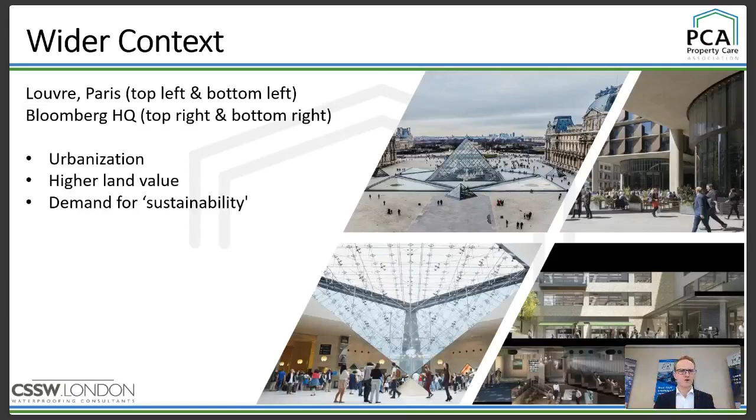What is a podium deck? Is it a plaza or a terrace or a balcony or a warm roof or a buried roof or a garden roof or a green roof or a blue roof or a tunnel or a bridge? It's got elements of sort of all of that.

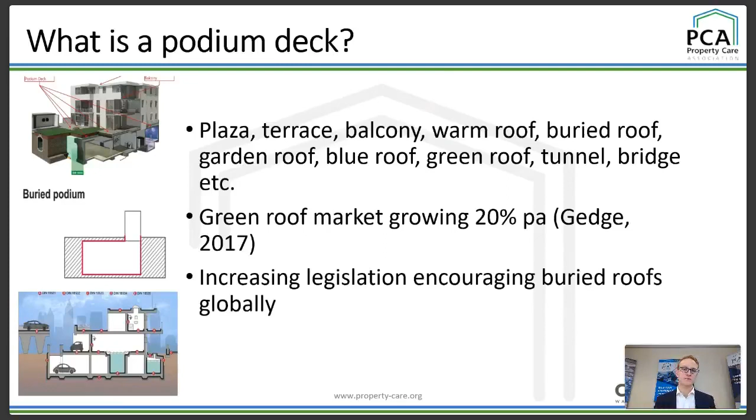Podium decks are very similar to green roofs, and that's a growing market in London. I think that market is growing about 20% per year. Globally, there's more legislation to put things on roofs. So France, for example, if you have a new commercial building, on that roof you have to provide either photovoltaics or green roofs. And that's not just France, you're also getting it in Canada. Certain cities have a lot of pressure to provide green roofs. So there's some wider context.

We were going to run this poll. Last week I was contacted by someone in another country, and he was saying he's involved. He's a structural engineer on a design team working for a pharmaceutical company, and they want to put 50 million pounds of equipment in a basement, and on top of that basement is a podium deck. And the structural engineer was saying to me, look, money's no object. What is the best possible waterproofing that we can do?

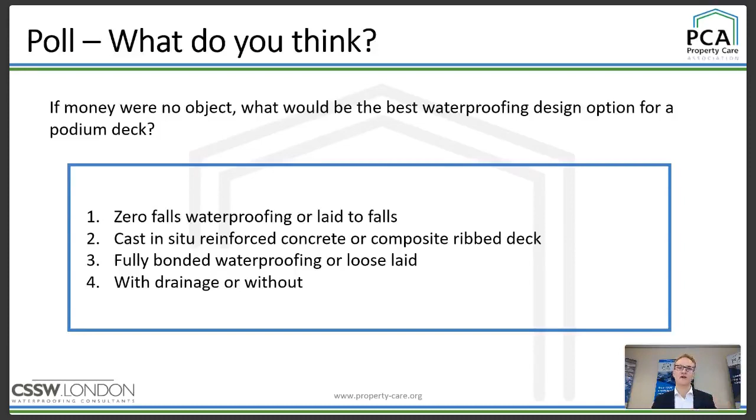So we were going to run this poll, but it doesn't work right now. But I was going to ask you, what do you think is better, zero falls or laid to falls? So that's a flat roof or a roof with a pitch to it. Do you think it's better to have cast in situ reinforced concrete, or is it better to have composite rib deck? Is it better to have fully bonded waterproofing or loose laid waterproofing? Is it better to have drainage or not have drainage? And these are some of the questions that are out there. We'll revisit some of the findings. When I did research, I asked those kind of questions, and I'll talk you through those findings in a moment.

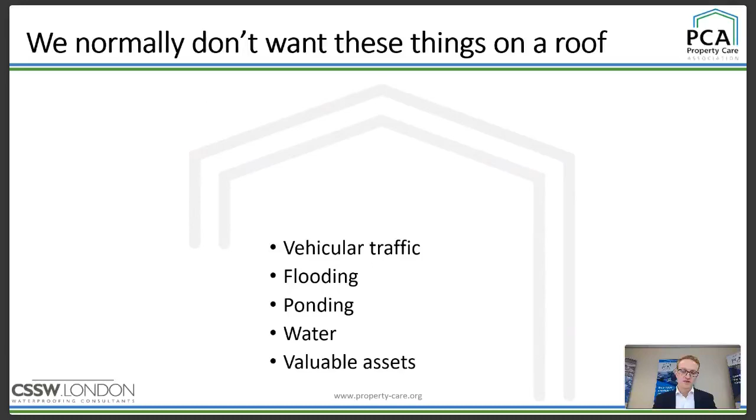There are some things that we don't want on a roof. And for many of those watching, the members of the PCA, they come from a building pathology background like I do. And I used to do a lot of residential surveys, and I'd look around houses. And if I was looking around a house, it was a pre-purchase survey, and I saw this on a flat roof, I would have a duty of care to say, well, there's a building defect. We don't like ponds on roofs.

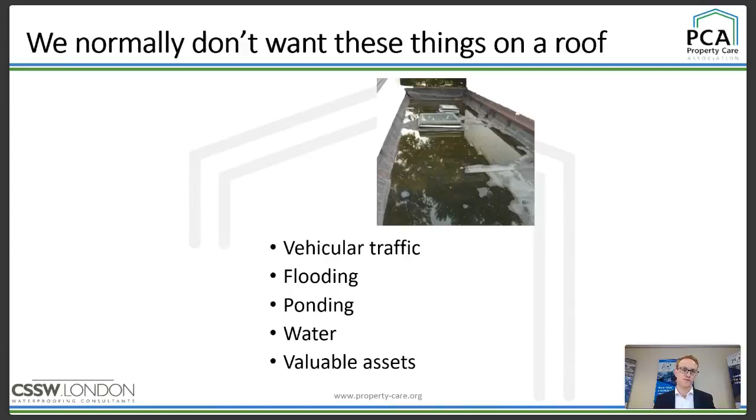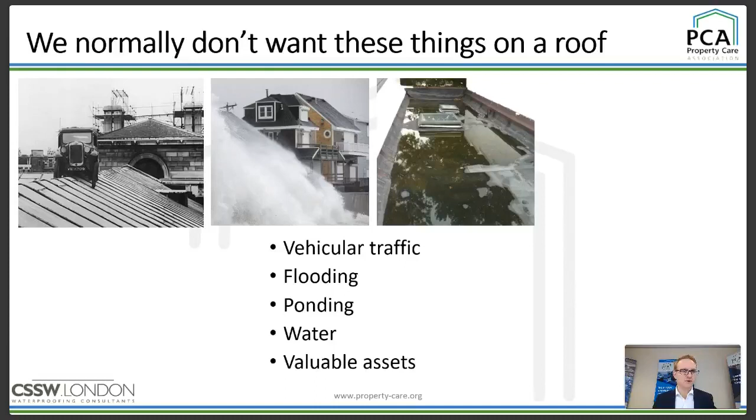That's not a good thing. We would hate to have waves on a roof. Roofs aren't designed to have waves on them. Flooding is not something that we normally think about with roofs. We don't often think about vehicular traffic on a roof. That's not something that we normally have to plan for. And we wouldn't expect to see something like a swimming pool or other very valuable assets on a roof.

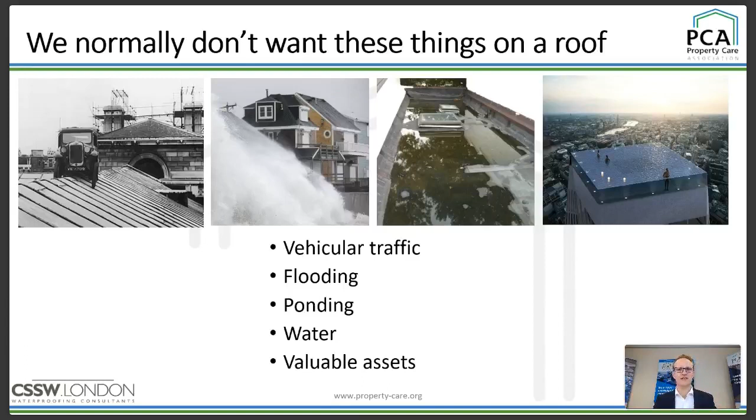And yet, somehow that gets through planning, and a developer requires it. And somehow, as a design team or as a specialist contractor or as even a supplier of products, you need to be able to come up with solutions for these issues. So we must design for them.

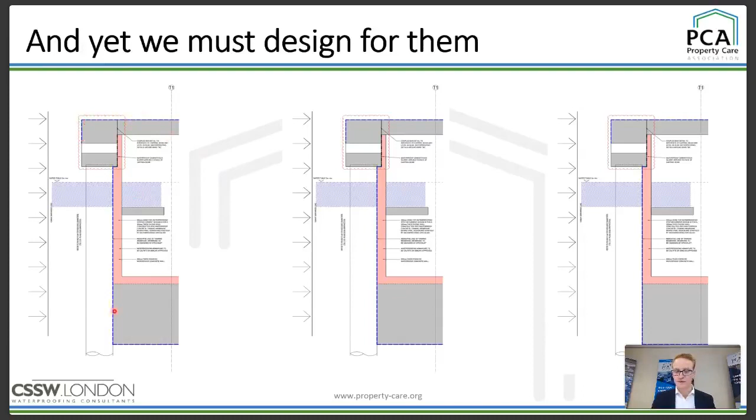This here is a section detailed through a basement in Manchester. And you can see this blue represents the water level, double-story basement, high water table. Blue is supposed to be watertight. Sorry, this pink here is supposed to be watertight concrete with a pre-applied waterproofing type A system down here. And over the top of there is a podium deck with some waterproofing of some description. Now in this circumstance, there was no way to convince the client and the other members of the design team that we had to have that podium deck to fall. So the reality is that podium deck will have ponding.

I'll put a picture of a fish there because you keep fish in a pond. We've also got to plan for, in this circumstance, traffic. So many podium decks have to be able to accommodate, for example, a fire engine. In an emergency, services need to get close to the building. That might be a podium deck. And in this circumstance, there's a 1 in 1,000 flood event comes to about 600 mil above your podium deck. And so we need to plan for flooding, which is different to most other building assets or other roof guidance.

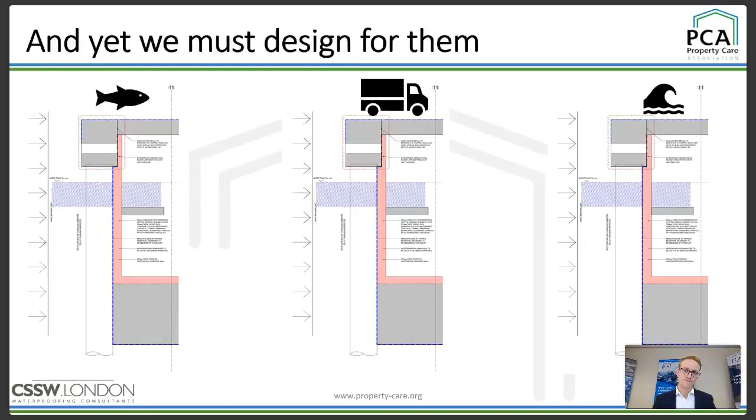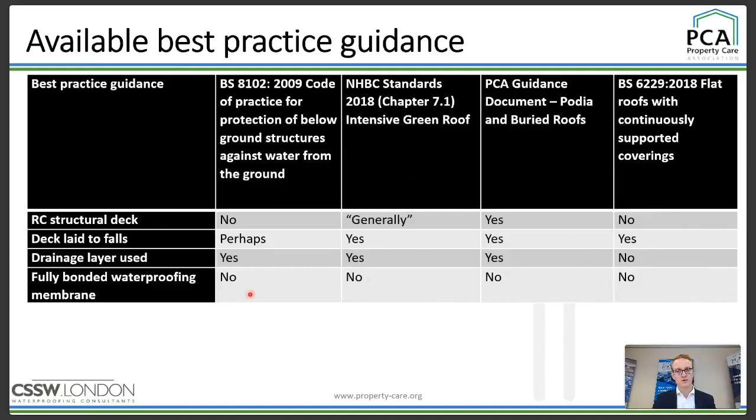NHBC chapter 7.1 sort of asks for a structural deck that's reinforced concrete. It does ask for falls, does ask for a drainage layer, makes no mention of fully bonded waterproofing. PCA guidance document, at the end of this presentation you'll be able to download a copy of that, and you'll share that somehow in a moment. And then BS 6229 2018 is a very fresh document, new, hot off the press, and that doesn't make much mention of reinforced concrete decks. Talks quite a lot about falls, and I'll cover that in a moment. Doesn't really talk about drainage, but none of these documents talks about a fully bonded waterproofing membrane, which is interesting, and I'll tell you why in a second.

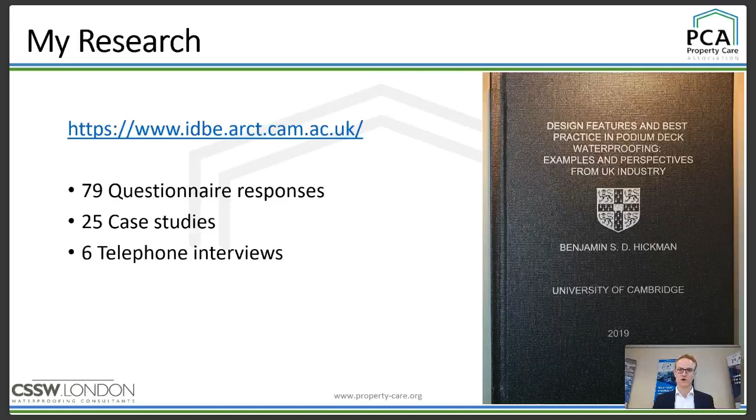I looked at 25 case studies of Podium decks that have gone wrong. And then I did telephone interviews with 6 people who were highly experienced, but had views that weren't what I would expect. So I'm just going to share some of the outcomes of that research in a moment.

I asked very similar questions to what I asked you earlier, which was - if money was no object, considering the best possible waterproofing - to what extent do you agree with the following statements? To what extent do you agree that reinforced concrete substrates are better than block and beam or ribbed deck? To what extent do you agree that falls are better than zero falls?

The options available to the respondents were: strongly agree, agree, neither agree nor disagree, disagree, or strongly disagree. That's called a Likert scale - you can give it to people as, to what extent do you agree with the following statements?

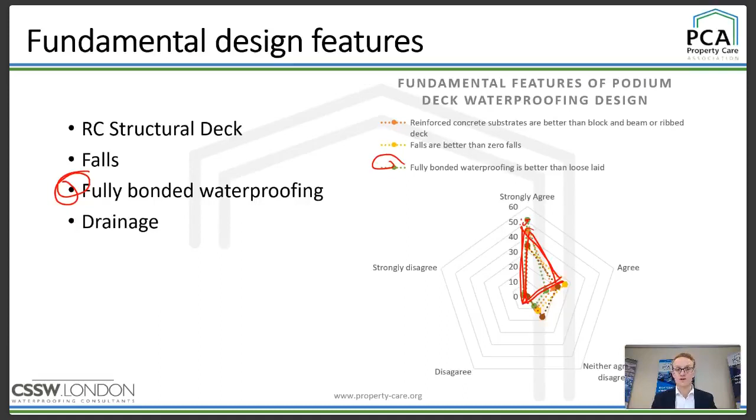Fully bonded waterproofing is - most people would very strongly agree that it's better than loose laid waterproofing. That's particularly interesting when you consider the table I shared earlier of best practice guidance, none of which says you should use fully bonded waterproofing on a Podium deck.

The reason we think fully bonded is better than loose laid is because if you have a loose laid waterproofing system, any defect allows water to track laterally across your substrate, and that makes it impossible to find the defect, which means you can't really repair it. Fully bonded systems would mean that hopefully, if you look up from a basement and see a damp patch, the defect in the waterproofing is directly above that damp patch.

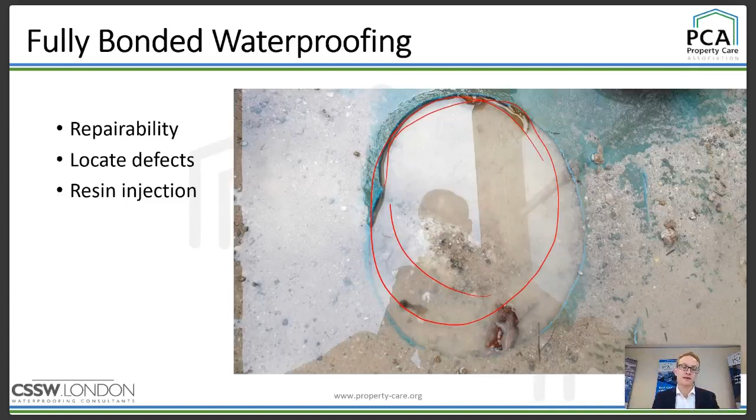So why is a reinforced concrete deck better? Well, primarily because it's dimensionally stable. With something like a precast concrete plank, there is a lot of movement, and that movement can cause a lot of shear forces on your waterproofing.

Reinforced concrete does mean you've got to deal with some crack bridging, so would any system. But you sometimes see block and beam, they move a lot. So if you have a block and beam substrate, it does flex, and that can cause issues.

Hollow core planks, again, they flex and they move against each other, which provides a very strong cutting force, really. So if you've got waterproofing across a precast concrete plank deck, and there's stuff above it and stuff below it, and one plank moves more than another, that's quite a strong cutting force, quite like scissors, really.

And rib decks, they're a bit of a nightmare, in my opinion, because your crinkly tin is actually waterproof a lot of the time. So it means you've got a waterproofing defect above your concrete deck that goes through your concrete and spreads across the crinkly tin, and it comes in who knows where. So again, it's impossible to find where the defects are.

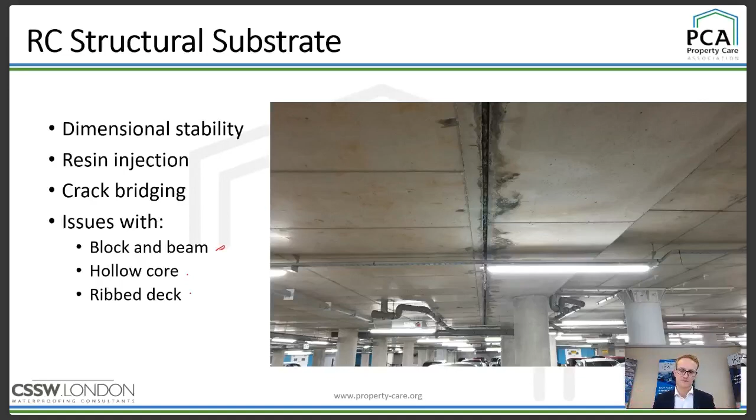The reservoir is the bigger one there, because if you have a small defect with a small amount of water, that small amount of water goes through and hopefully evaporates from the underside of the deck. But if you have a lot of water goes through a defect, that's a problem.

So you've got to make sure that you've got sufficient drainage. Importantly, those drainage outlets must be in the right place, and there must be the right number of them.

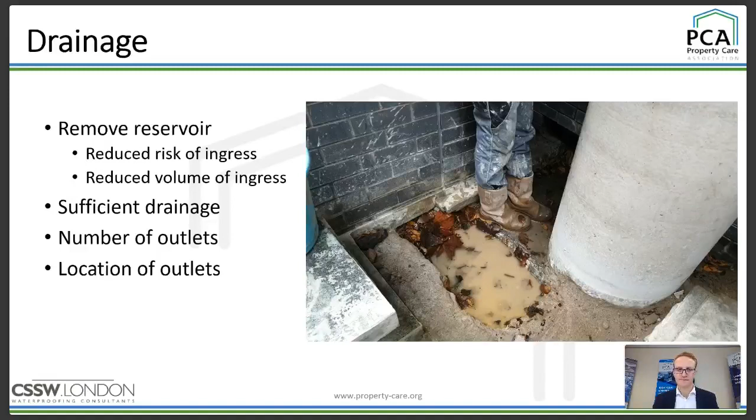Why? Because removing water off a roof reduces risk. It's very basic, very obvious. So what sort of gradient to falls would you get? Well, BS 6229 would say design a 1 in 40 fall so that you achieve a 1 in 80 fall.

I put here mention of zero falls. Now, zero falls is a bit of a funny thing. BS 6229 probably most clearly defines what zero falls is, and it's anything less than a 1 in 80 fall, but it cannot have any backfalls. And backfalls are basically the ponds. So zero falls is a very tricky one.

But I guess my own opinion is if you've got waterproofing to a roof type structure or a podium deck, having falls is really going to help remove water, and that's a good thing.

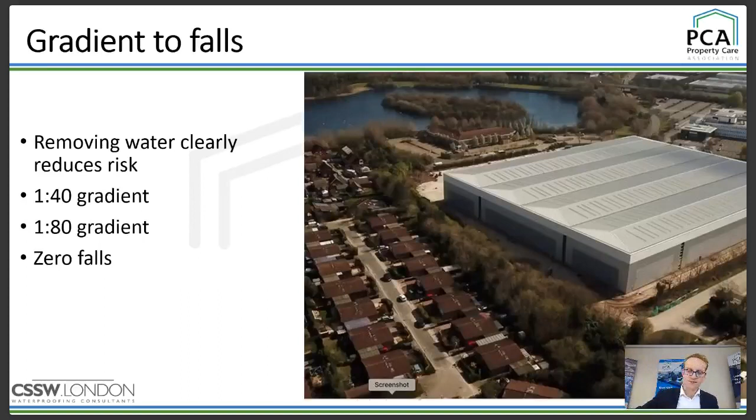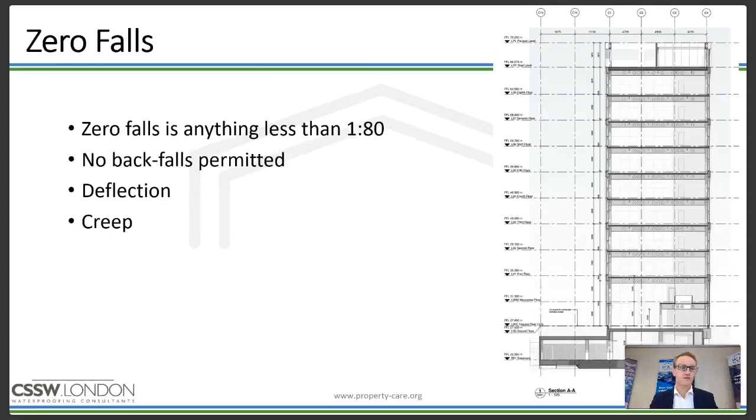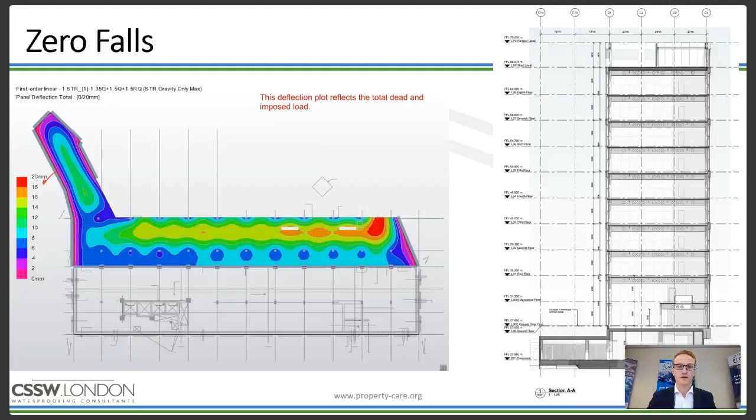Zero falls - many products will be accredited by BBA for zero falls situations. Unless you've actually designed in falls, you haven't got zero falls. And what you can do is put your outlets in your depressions, your points of deflection, and that in some ways does give you falls.

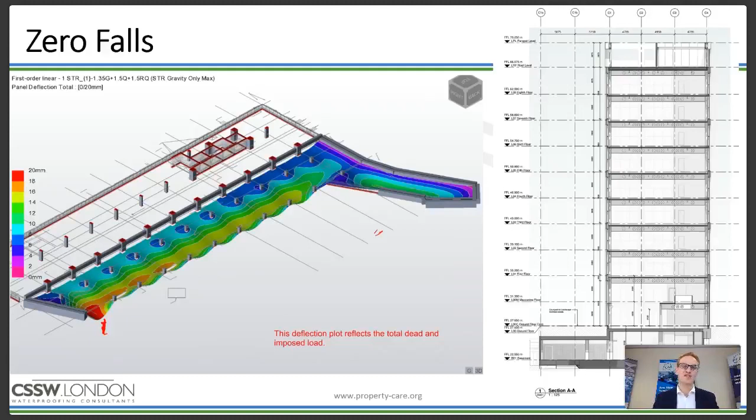So I'm now going to talk you through, I think it's 4 different possible podium deck build-ups, and just try and explain what are the benefits, what are the issues.

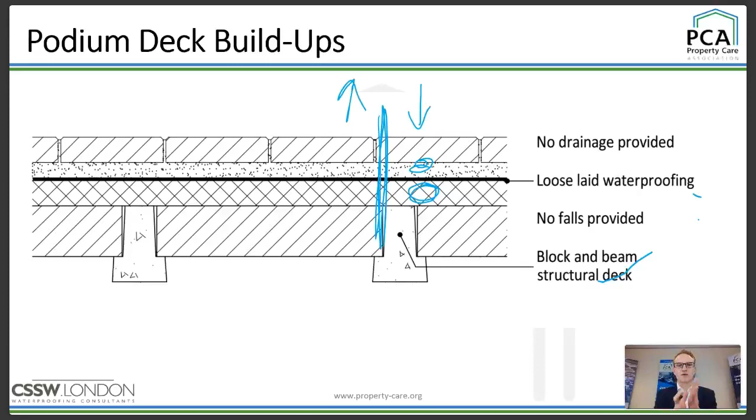Here's another build-up. You've got block and beam with loose laid waterproofing. Block and beam substrates are a bit of an issue because you get deflection, so you get movement often across there. You can see that this bedding mortar is sandwiching the waterproofing against this screed. If they move differentially, so if this bit goes down and this bit goes up, it's like scissors on the membrane, so it causes defects to the membrane.

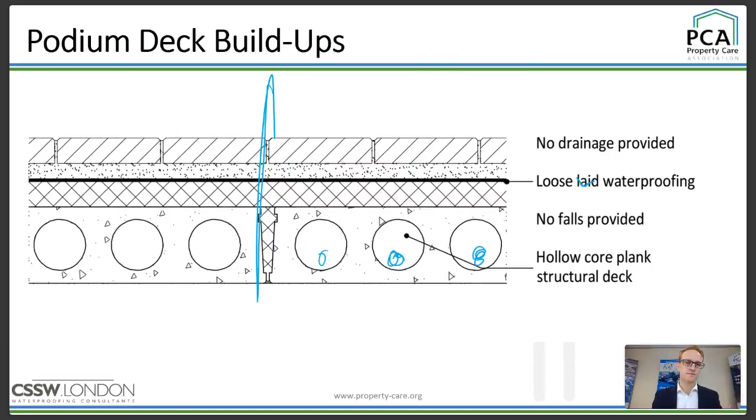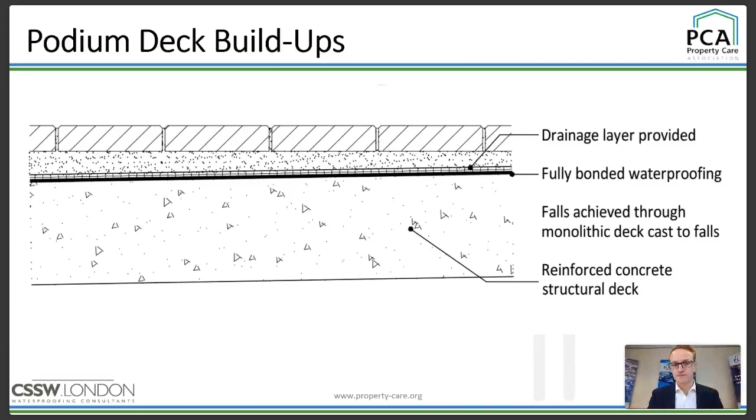So here's what I think is the best possible podium deck waterproofing build-up. You've got a reinforced concrete deck that is monolithic and it's laid to fall. Monolithic means there isn't 2 separate layers to it. There isn't a screed layer that's tapered into falls. The whole reinforced concrete deck is cast to falls. You've got fully bonded waterproofing and you've got a drainage layer, so water can run away. If there were a defect here, water you would think might come through somewhere there. So you can sort of trace where the defect is, and you can assume that you can do a localized repair.

So I'm now just going to run through, I think it's 8 different additional things. I've run through 4 things so far, which I think are the fundamental features of podium deck waterproofing. What is your substrate? What is your waterproofing? Is it fully bonded or loose laid? Have you got any drainage, and have you got falls? Those are fundamental features.

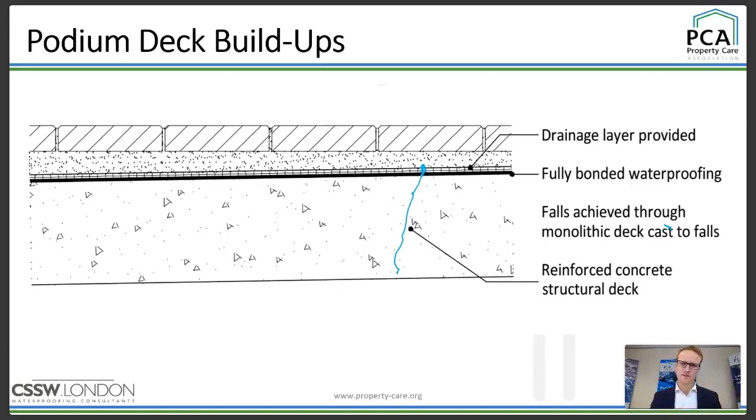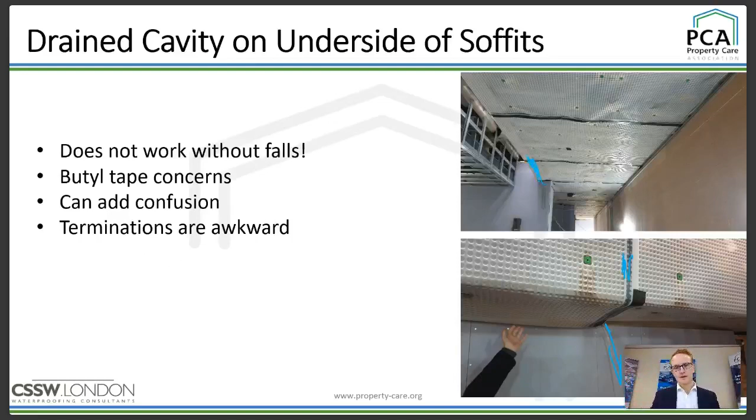Movement joints are a tricky one and common to podium decks. So I would say, if at all possible, remove them. And that means a lot of close discussion with the structural engineer.

For podium deck waterproofing, much like basement waterproofing, you want somebody involved early on in the design stage, who can liaise with the structural engineer and architect and influence the shape of the building. It's not just a case of detailing, whack on this product in this place - there's more to it than that. And something like a movement joint makes it quite obvious.

So avoid movement joints, and if you must have movement joints, try not to make them on a boundary line. That's just the natural inclination of developers in the developing process. The developer will say, here's the whole site, build a basement under all of it - tower 1, tower 2, tower 3. And they'll draw red lines saying, this is plot 1, plot 2, plot 3, and they might sell off plot 2.

If you have a movement joint on that red line, then you've got design team A and design team B, and neither is responsible for the movement joint - it's just a common point of ingress. It's a very weak point, because movement joints have to be flexible.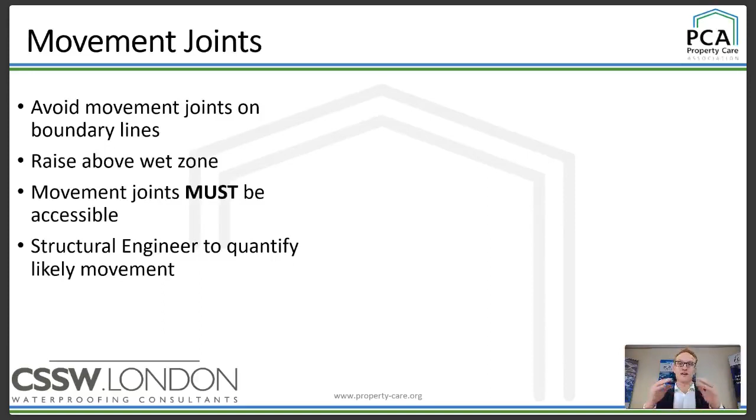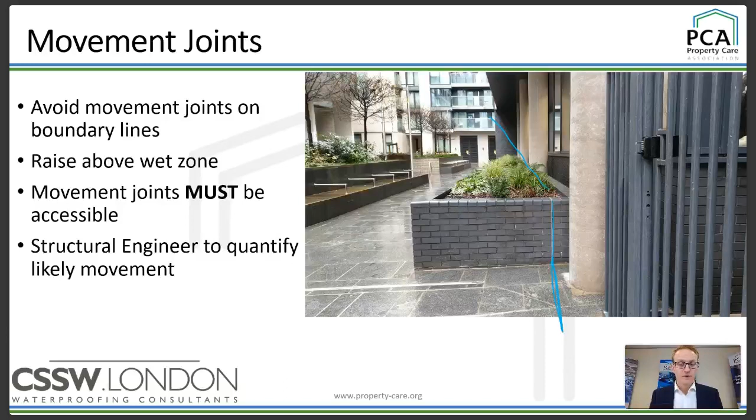Movement joints must be accessible. On this development, there's a movement joint that runs along here - you can see it runs up the planter and out all the way through the whole building. Under that planter, the movement joint is not accessible, so if you get a crack to it, you can't fix it.

It gets worse. In this circumstance, I have no idea how this works from a structural perspective, but the movement joint is also inside a cavity further up the building. So any water that bypasses the cavity tray will accumulate in the cavity, sitting right on top of a movement joint. There are defects to it, and there's no way of getting to it and fixing it.

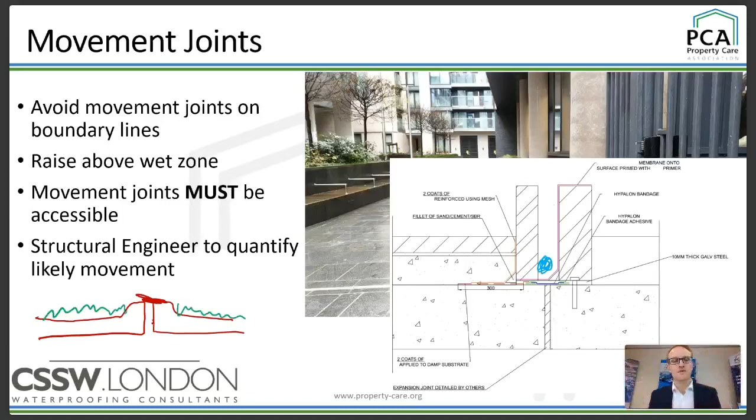It would be much better to raise movement joints up out of the wet zone, on a little upstand or curb. Forgive me, I'll just draw a messy diagram - you could do something like this, where that is your movement joint, and here is a drainage layer. So you raise your weak point up above, out of the water, so there's no water sitting on a movement joint.

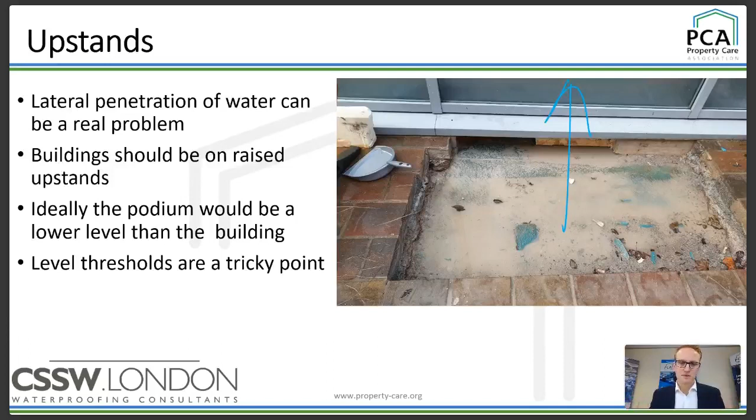A similar point and a tricky one is level threshold. We all know the 150 millimeter rule - if you're on a roof or at ground level, you want your DPC 150 millimeters above ground level, and on a roof you want a 150 millimeter upstand. With level thresholds on a podium deck, that becomes an absolute pain, and you can't really achieve it - you can end up with very tricky situations.

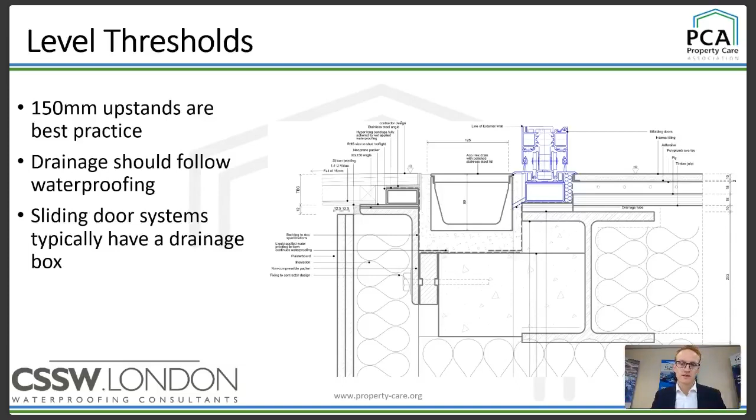So there's lots of tricky things going on there, and that's quite common, particularly in smaller residential developments or refurbs. I see that quite a lot in London - many of you will too. I'll talk you through that specific example in more detail in a moment as a case study.

That's quite a common issue, and cavity trays are a nightmare when it comes to podium decks. So pay extra attention and always question, if water does go past a cavity tray, where will it go to? And that should inform how we waterproof things. I think you can also go a step beyond that and say, well, let's do the cavity tray differently. In this circumstance, let's use welded lead. Let's test it. Let's do some quality assurance before we close it up. All of that kind of thing.

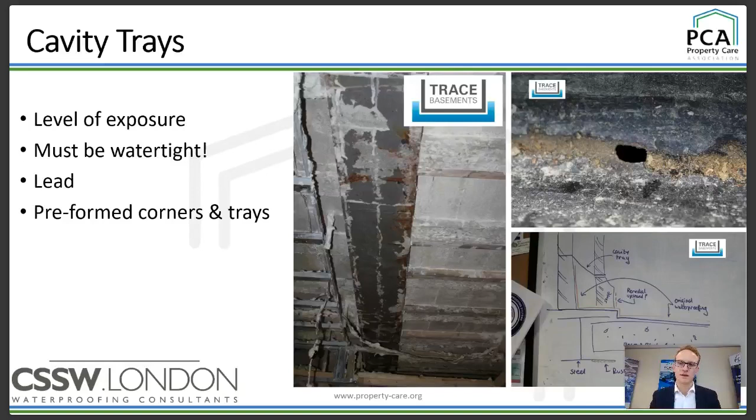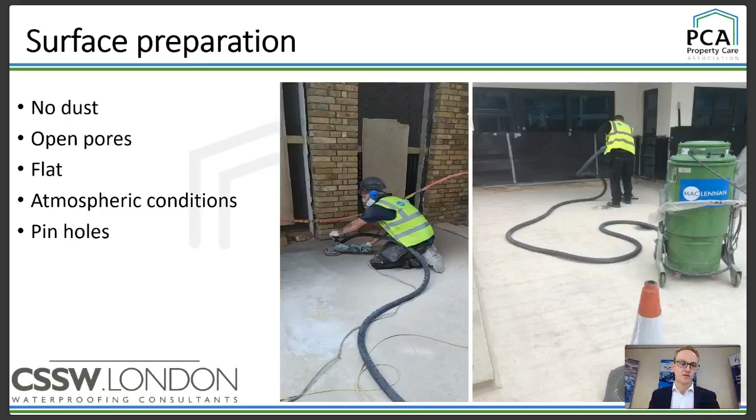So in terms of workmanship, you need to make sure that the substrate is sufficiently dry, the surface is well prepared, and then you've got to check for backfalls. And that sort of works, but it sort of doesn't work in terms of backfalls because, well, that's going to change when you put a few tons of earth on top. But I would also always recommend doing integrity testing or flood testing. Problem with flood testing is it's going to take a long time for water to find its way through the defect and then through the concrete. And then you can't recheck it once you think you fixed it. It just takes too long.

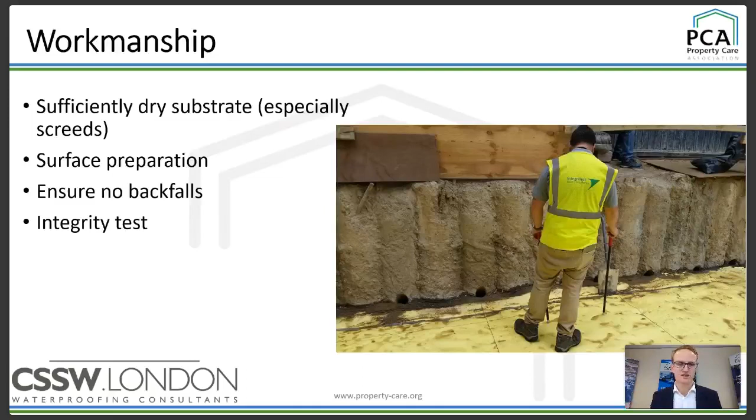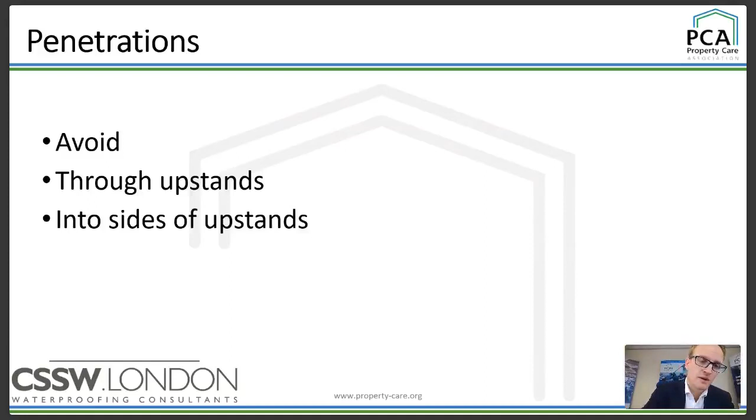I've got a couple more of these finer things, and then we'll be going on to a case study. So the last one, I couldn't find an image, so I thought I would try and draw you one, which, apologies if it looks a bit scruffy, but you should always avoid penetrations if you can. But if you can't avoid it, I would strongly recommend putting your penetration into an upstand. And the reason why that's helpful is because you can raise that weak spot up out of the wet zone, which is similar to what I was saying with the movement joints.

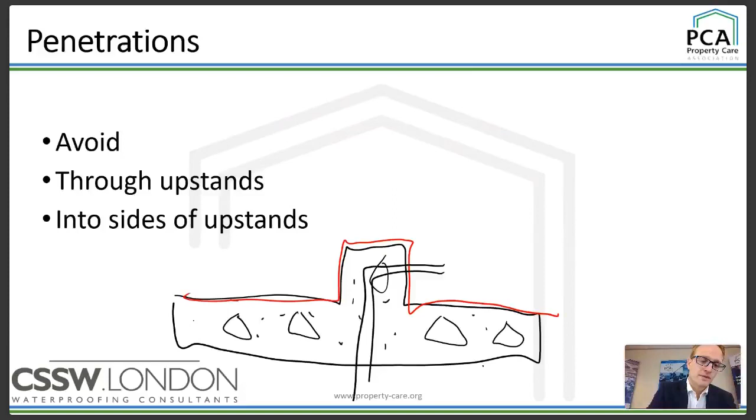So if that is your penetration, you can put in a drainage layer, and over here, and it means that if there is any weak spots here, really not much water is going to go in. I hope that nasty graphic gives you some idea of what I'm talking about. But penetrations, avoid them, and if you can't avoid them, put them in an upstand of some sort.

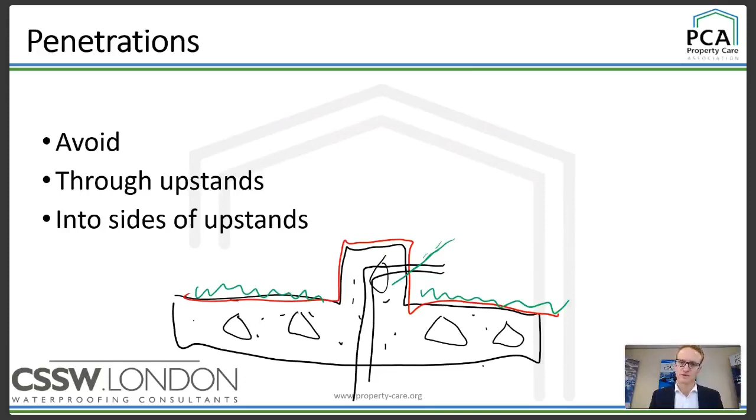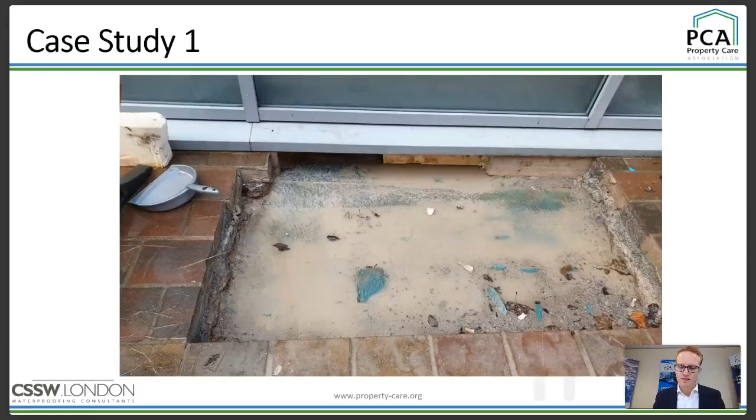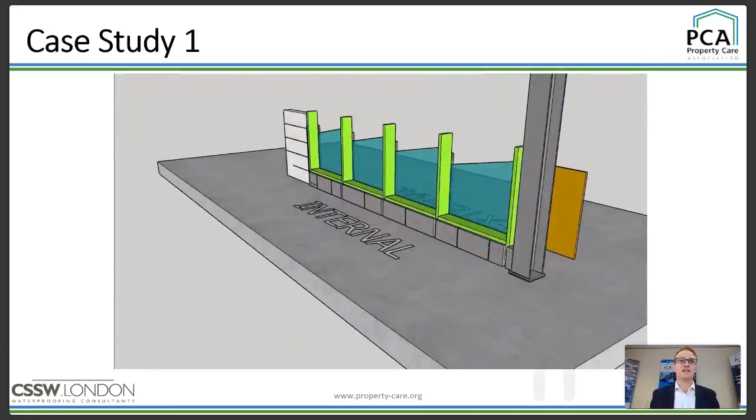So we've got time for only probably a couple of case studies, and the first one you've already seen this image, and my colleague Mark put together a very useful graphic to help me talk you through it. I think this is working. Yes. So Mark is design manager at CSSW London, and he's done this little basic animation on SketchUp. And so looking from the inside, which is Tesco's, you have some insulation, DPM, and then screed, and that is the internal accommodation. And then we'll flip around and look at the outside.

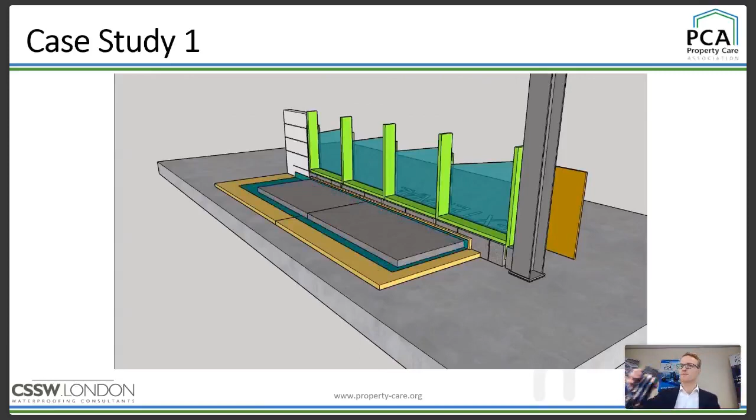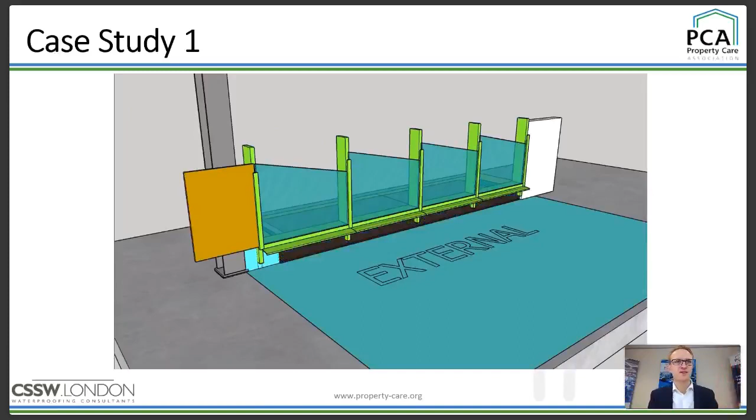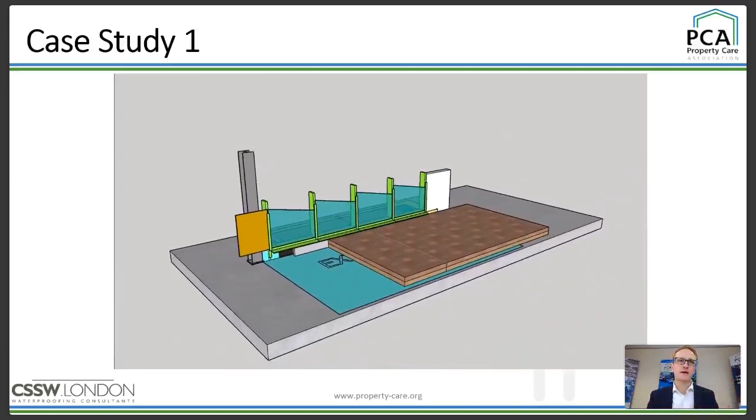So obviously the structural podium deck is level throughout. I recommend you don't do that. There's a sprayed polyurea. On the upstands, you've got the mullions are poking out, which is part of the problem. The black stuff is the EPDM coming down, and there's some edging, bedding, and paviours. So obviously it's a bit of a weak spot to have the mullions poking out like that.

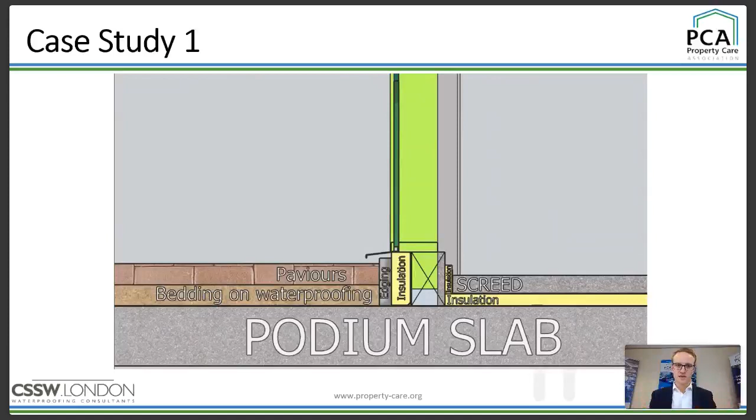But through the section, you can see that, well, there's no drainage provided. And so what you get is water percolating through the paviours, through the bedding material. It's got nowhere to go, and it's building up to a depth of at least 150 millimeters. It's finding a defect in the upstand and then traveling across the podium under Tesco's in that example. So I would strongly recommend raising your structural slab at the point of the buildings.

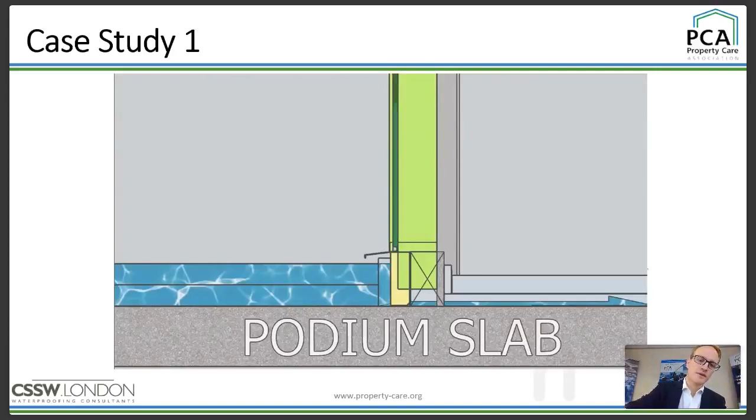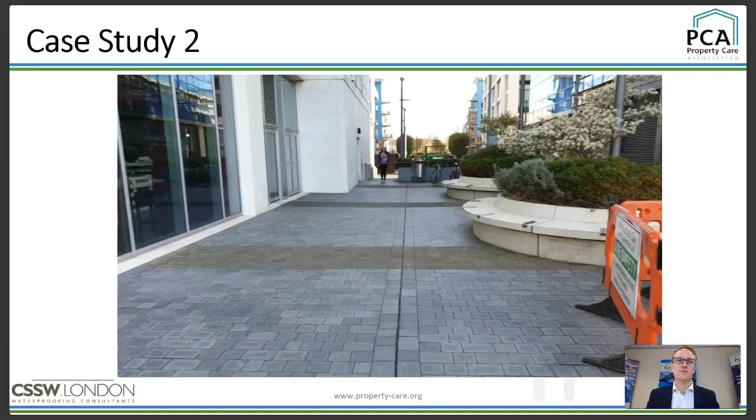Case study 2, I'll go just very quickly. That's a podium deck with a slot drain. Under that is a basement car park, and the build-up is something like this.

So you've got a deck that's cast to falls. That's one of the things that I recommend. I think that's very helpful. But there's no drainage provided.

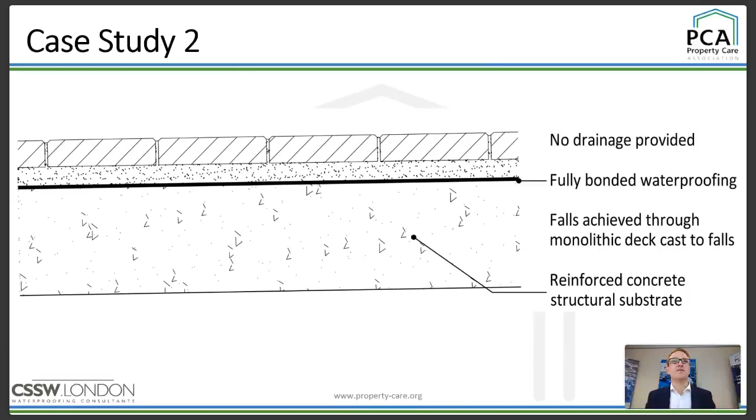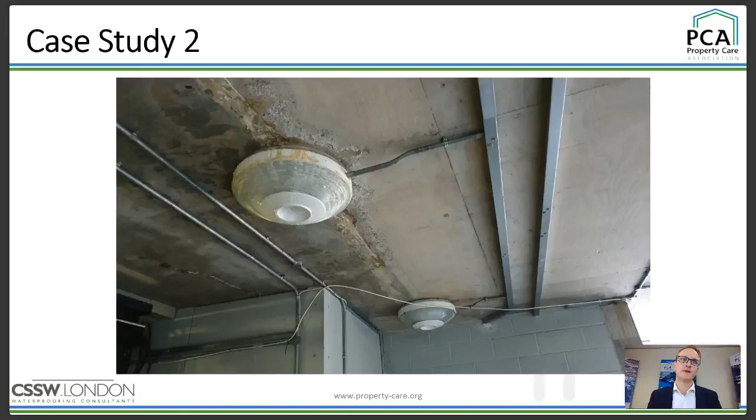And what that means is the bedding material is saturated. So when you take up a paver and bedding material, you see a pond. That means water is finding defects and coming through. You can see these nasty mineral deposits coming through at construction joints and movement joints. They cause quite ugly spots and damage paintwork a lot.

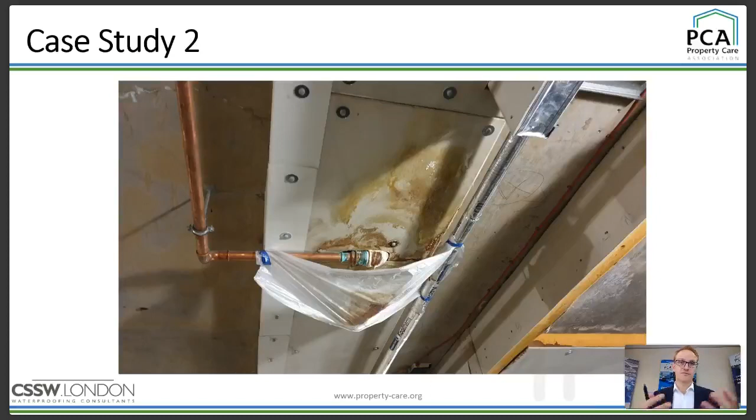And you often see with podium decks these kind of funky gutter attempts. There's a website I'd recommend called newpig.co.uk. They sell very good gutter arrangements that look like that, do the same thing, but are better looking.

Water often comes through the cracks. In this example, that is this picture I showed you earlier, but that is a garden in London. Somebody wanted to maximize their space, so they excavated a basement out under their garden, put a podium deck on top with a walk-on skylight.

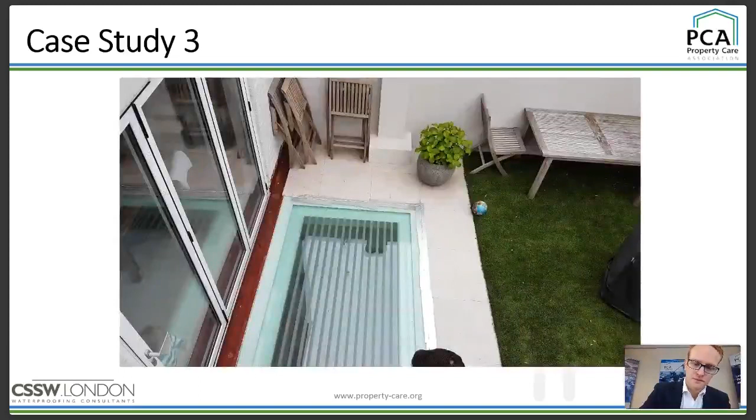You can see some horrible flash band around there. There's an ACO channel at the back there. It's on an RSJ, so there's a lot of differential movement, but we've got this issue where water can't get out of this spot, and you've got a lot of deflection and differential movement.

So my top tip in this sort of circumstance is you want your waterproofing coming the full height. And you also want that waterproofing supported with a drainage layer, again, to full height, so your drainage layer comes all the way to the top. It just gives water somewhere to go. I'd still hate that arrangement, but hey, that's the best I can come up with.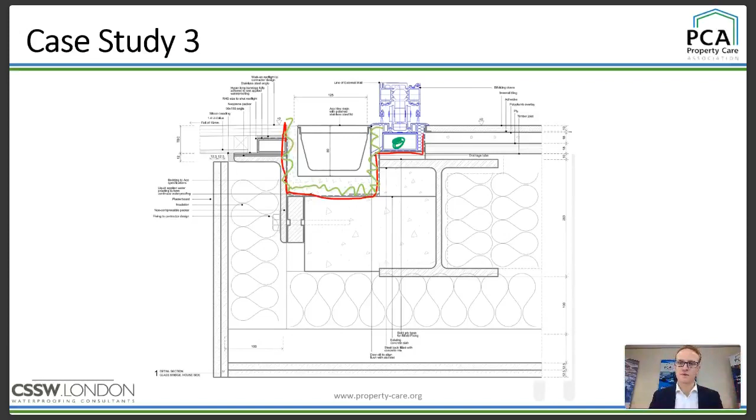That's looking at the underside of that walk-on skylight. We did some dye testing.

How are we doing for time? Shall I skip this one? No, you've still got another couple of minutes, crack on, and then we can go into question time.

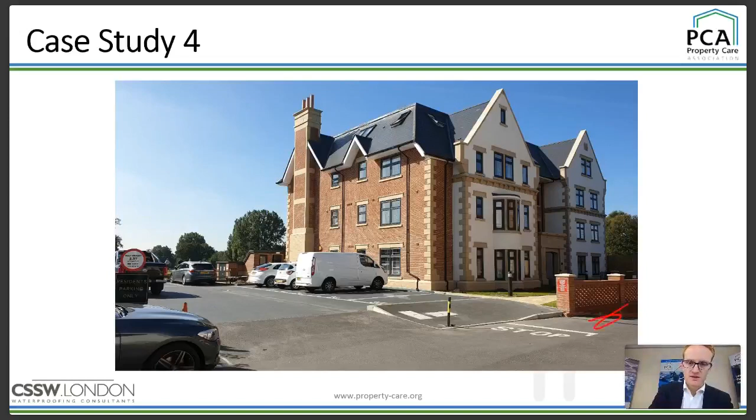Okay, this is case study number 4. You can see down there is a ramp down into the car park basement, and that basement carries on under all of this here. And that you can see is a drive-on trafficable waterproof surface.

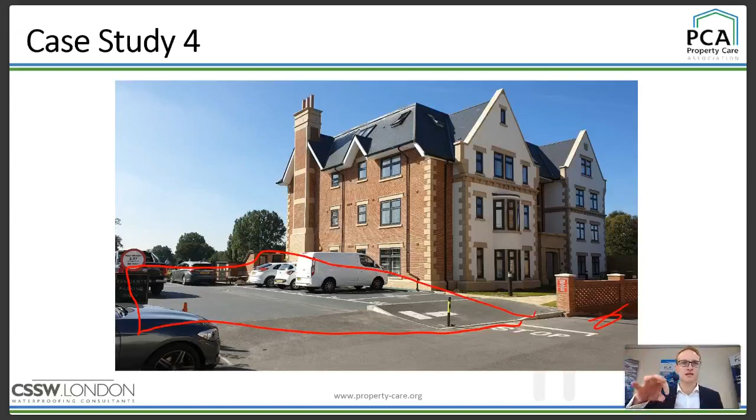And so if you've got your power steering on your big truck and you twist your wheel, those shear forces are acting nearly directly onto the waterproofing. It's a deck of precast concrete planks, and you can see some beautiful straight lines of stalagmites forming on the floor.

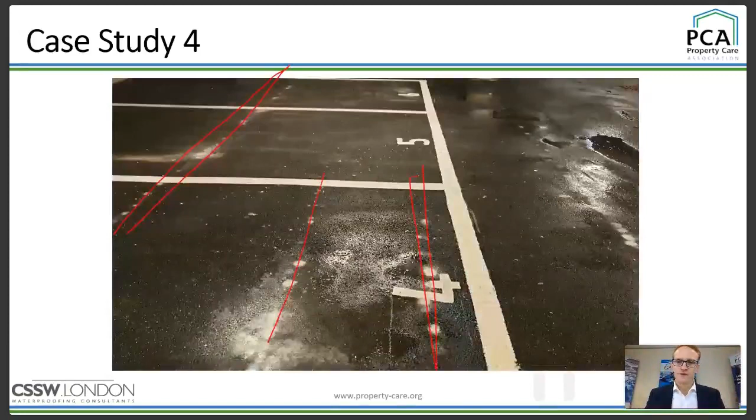And that's a very typical, obvious example of precast concrete planks. And you've got a car moving on it, so there's differential movement, and the waterproofing just cracks at those junctions.

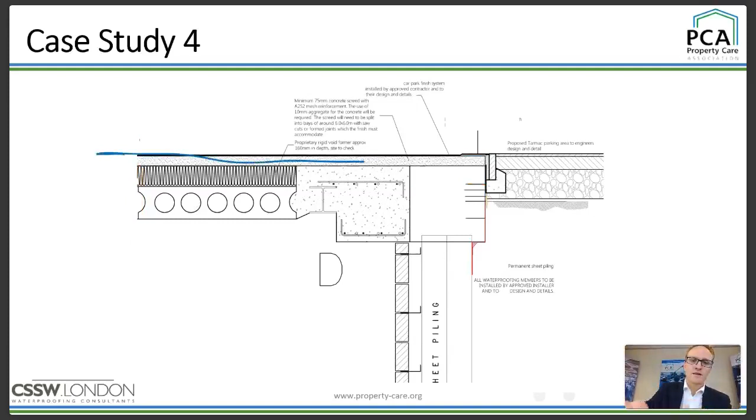I'm not sure if I've already covered it, so I'll just explain briefly. This here is a funny junction where this down here is the substructure and this is the superstructure.

What you get in developments is, some developers want planning, they get planning, and then they want to pass it on and say, let's develop the design at RIBA stage 2 or 3 or whatever it is. You typically pass off the superstructure to the architect, and the substructure to the structural engineer. Those are led by different design disciplines.

And you get this design interface at that blue line-ish. You often get what's called a scope gap, where the structural engineer thinks that waterproofing to the podium deck is not in his package, and the architect thinks it isn't in his package either. So you can get to the point where the building is pretty much done and no one knows who's responsible for waterproofing the podium deck.

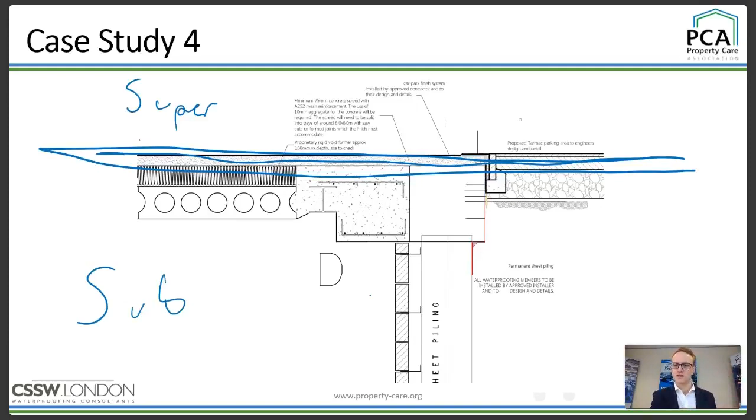I guess I would advocate for much more joined up thinking. That's why, for basement waterproofing where you have a requirement, you must have a CSSW suitably qualified waterproofing consultant in from design stages. I think that's also applicable to podium decks.